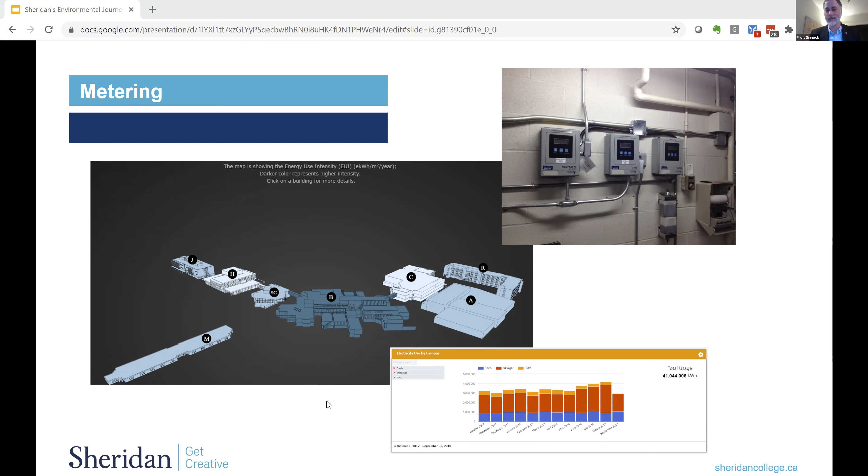So here's the journey in pictures, just sort of bits and pieces of the whole thing. So submetering, we had all kinds of stuff we couldn't see. How much energy do we use? I don't know. So submetering gave us this opportunity to say, all the energy that's going into a building, we now can quantify it, we can display it, we can analyze it, we can understand it. Now it's manageable. Then there's pretty mundane stuff. We have bad doors, let's fix the doors. We have windows that let in a lot of solar heat gain. Could we make those better?

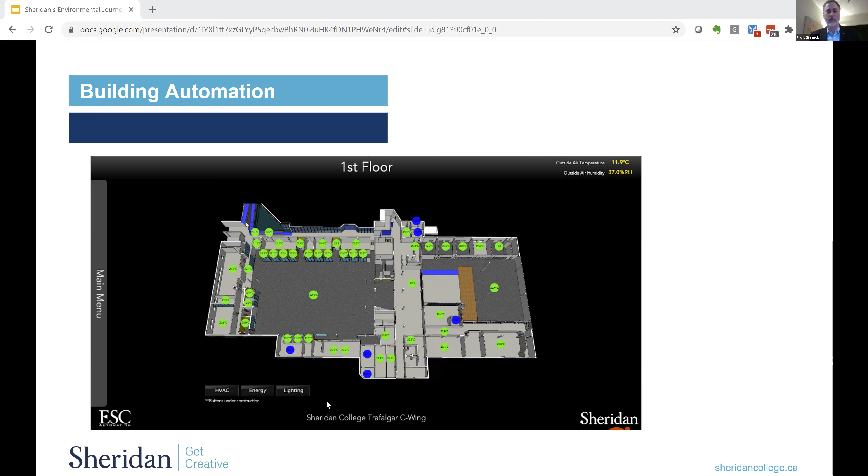And all of that, just in the business of, how do we make the buildings better? Our poor building operators, they couldn't see if something was going wrong. So we gave them some tools to quickly highlight, hey, this room's too cold, this room's too hot, this one's just right. These Goldilocks zones of rooms across our whole facility. So now they had these tools at the ready. They could pull them up and see, is there an area I need to go address and pick up? But again, pretty routine stuff.

The lighting was horrendous. In an office one night, I put a little sensor just to measure lighting. It showed me that the lights, for some reason, turned off for the day at about 3 a.m., turned on again at 6 a.m. This is completely random. So across this facility, we had lights that were misbehaving. You know, it's lights behaving badly time at Sheridan. So our program was to replace with fewer but better fixtures, typically LED.

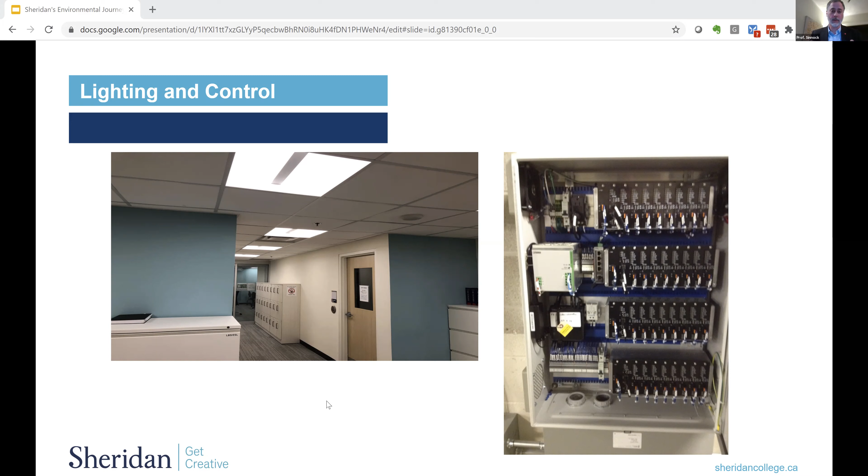We could actually adjust the timing of how long lights stay on. We could also dynamically reprogram a space if it changed uses. Now it's an office, now it's a classroom. Well, we don't have to rewire lights. We just reprogram. So really tons of flexibility in that.

So then comes this challenge of, you know, we've got new buildings coming up. What are those going to look like? And we really wanted to make sure we were beginning to incorporate all of these great energy saving features we saw into buildings that should become the most energy efficient in North America.

So this was around the time when we were specifying these when I took a trip to Sweden, and I'm looking at doors with double seals. I'm looking at wall assemblies, triple pane glass, high R value, very highly insulated and no infiltration, right? So no air getting through these things. And I'm thinking, I've got to bring this back.

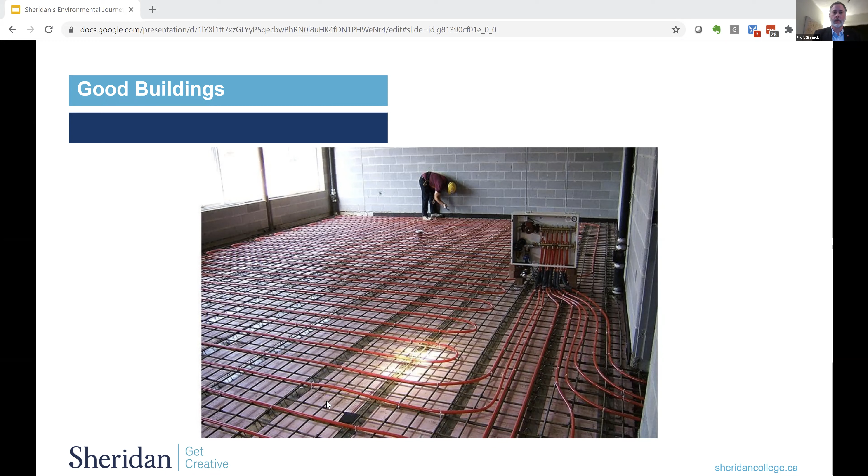It brings in just the amount of ventilation it needs to keep occupants healthy, and it uses 110 water source heat pumps to heat and cool spaces as they need. So if they're occupied and they need cooling, then the heat pump does it. And the idea basically is those are all tied back to a common loop. So it might be that half the building's heating, half the building's cooling, and we're going to use the least amount of energy we need to.

But electricity is expensive. Maintaining 110 heat pumps is really expensive. And would you look at how much glass is on that building? All that sunlight, all that heat getting trapped like in a giant greenhouse.

So when we measure performance, we talk about this idea of energy use intensity. You sum up all of the energy that's consumed in a year, and you divide it by the square footage. This building would consume about 277 kilowatt hours for every square meter in a year. You compare that with an Ontario average, that would be like 330, maybe 350.

You compare it though to Germany, a German A-rated building, so at the top of the spectrum at the time, that would have been low 100s. So low 100s to 277 to our average at 330. Not the best we could do.

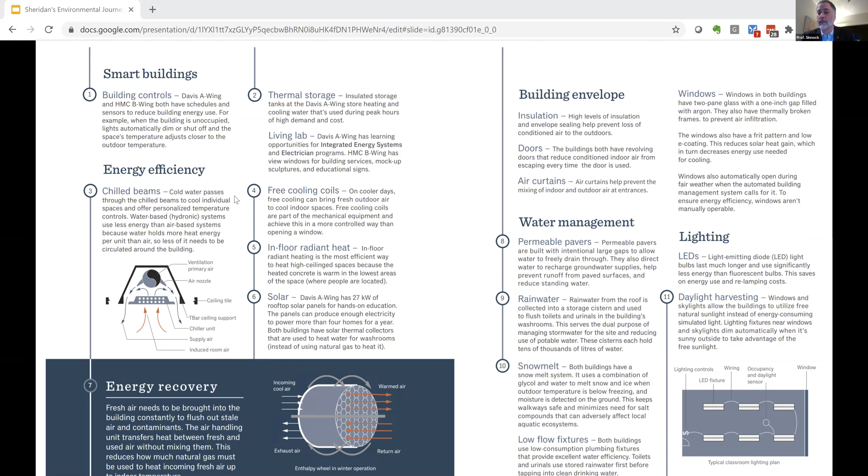And all of this stuff really quite heavily featured in the industry magazines and in press because it's just interesting and new and novel. I also point out here that we do rainwater capture from the roof, that we use it to flush toilets. And we melt snow rather than applying salt outside our sidewalks. So we've tamed all this energy demand.

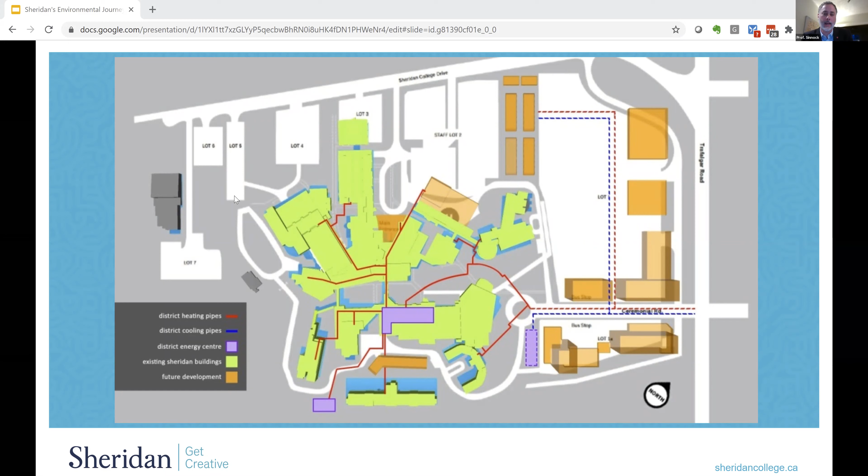Our attention now turns to how on earth do we get heating and cooling to this? How do we tie in the existing buildings we've got? How do we build new when we're building out the site? And we look again to Europe. They use these wonderful district heating systems. We talk about district heating in North America. What we mean often is I've got a steam boiler somewhere and I'm sending steam through pipes to somewhere.

European style district energy still has some property that needs to receive heat or cool. It has pipes. It has some source of that. It has probably the ability to recover heat from somewhere, but they will always use a pressurized hot water, so only water, not steam. And they'll try to keep the temperature very, very low. The lower they keep the temperature, the more heat they can pull from places where it'd otherwise be rejected to the atmosphere or thrown out. So they've found this way as a path to get to these low carbon integrated community networks.

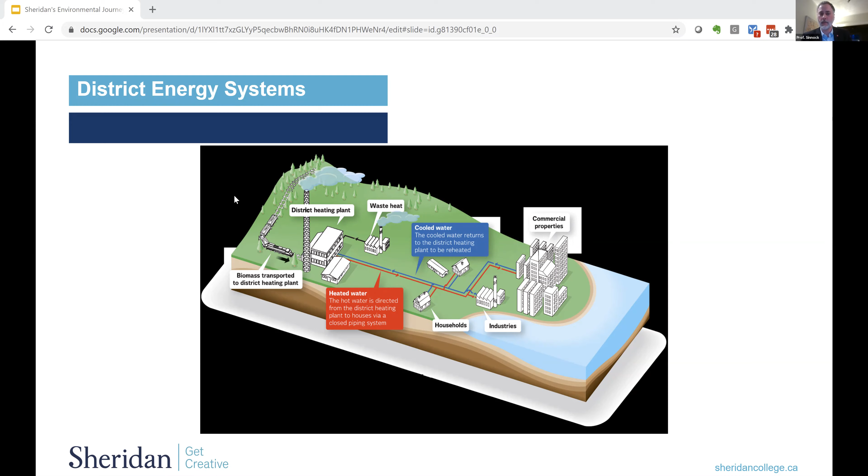And this is complex. It was complex for us. We wanted to know how we were going to implement this authentically, how are we going to create value, and we had a bigger plan in mind at this point. So we began assembling around us bit by bit a strategic implementation network, partners that could work with us. And we began implementing like crazy.

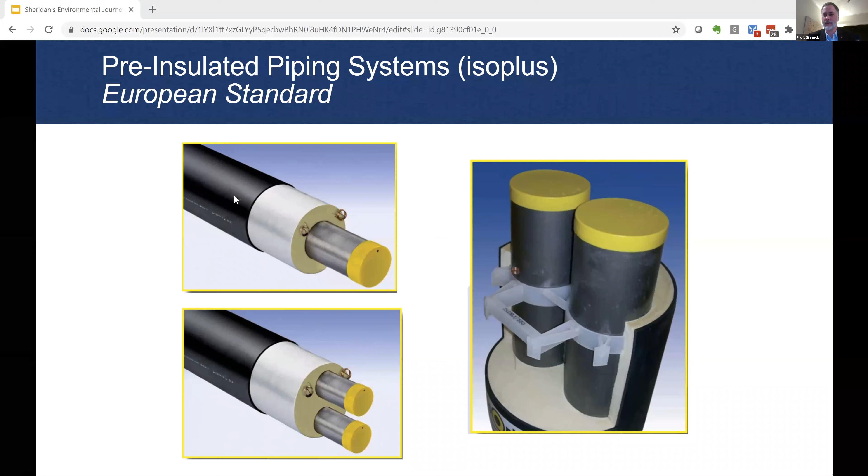So 2016, we started putting pipes like this in the ground. These are pre-insulated pipes. They're manufactured. They come like a system you put together, part A to part B. They have a rigid jacket, this closed cell insulation. They have leak detection, so we know if they break, and they're meant to be in the ground for 50 to 75 years. And the awesome part is they don't go very deep. They're so fast to put them in.

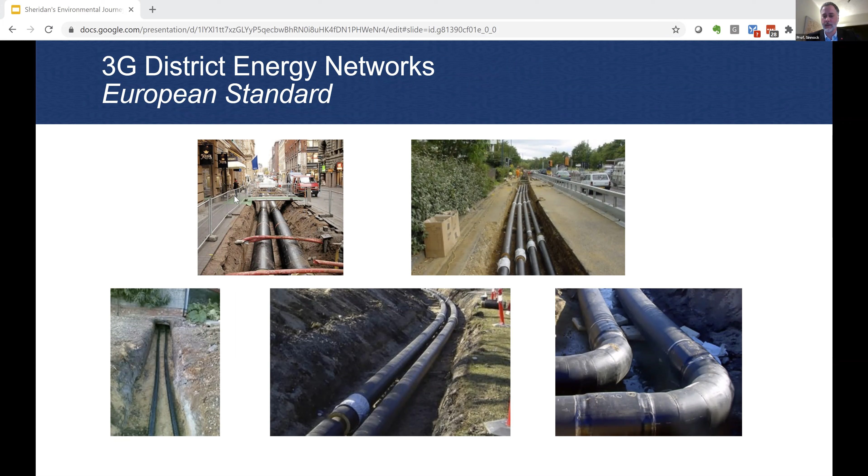And this is, again, just an area where the Scandinavians and Germans had figured it out over hundreds of kilometers of this stuff. And yet still in North America, we're trying to figure out how to make this as complicated as possible. Let's put it in a concrete vault. Let's spray foam it. Like it's ridiculous. We even bought the right product, but we put it in wrong. My eyes were rolling back in my head as I'm sort of looking at what we're doing in terms of not honoring the actual intent and method and cost.

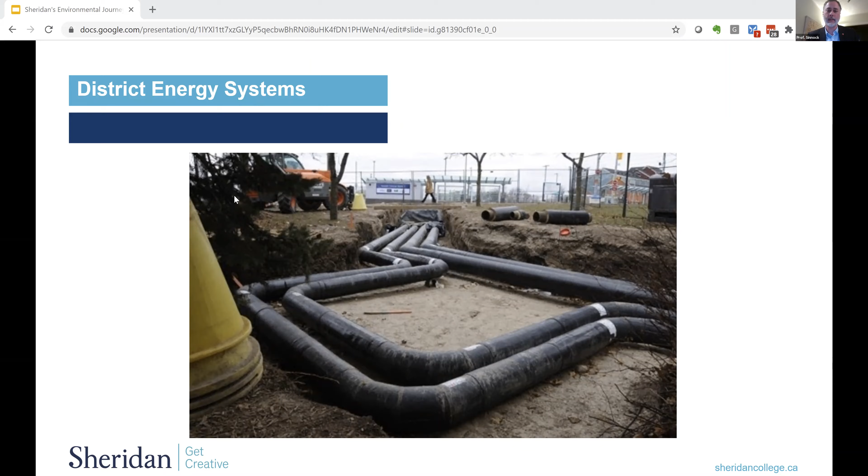2016 in the summer, we had 16 weeks. We put 3.5 kilometers of this pipe in the ground, both Oakville and Brampton. In this picture is actually these long lengths of twin pipe. This is supply and return in one pipe jacket. This is actually a way to save energy. It was the first installation of twin pipe in North America, and it was done at European costs.

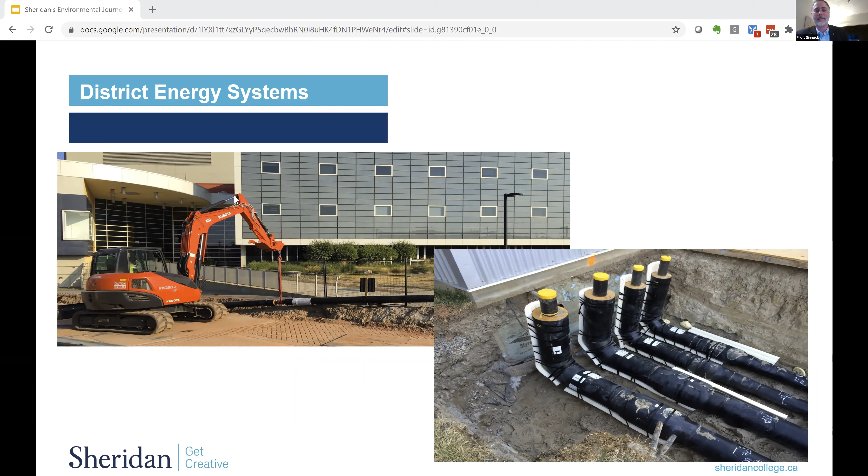Expansion for these things, it's engineered into the system. All that you need in order to handle expansion in a system like this are these little foam blocks that I think they might have electrically taped to the pipe, but that's all it really needs. So it actually becomes very, very simple, very quick. And as the crews get more experienced, they can do this very fast. This became part of what we started telling the communities around us: hey, we can do this really fast.

We needed a way to put heat in. I was inspired by what I was seeing out there, these architectural masterpieces that were out in communities in Europe, where they're centerpieces of the community. Could we build something beautiful and functional and highly efficient? This is in our skilled trades building. I glassed it in so the students would go, what's in there? I want to know what that's about.

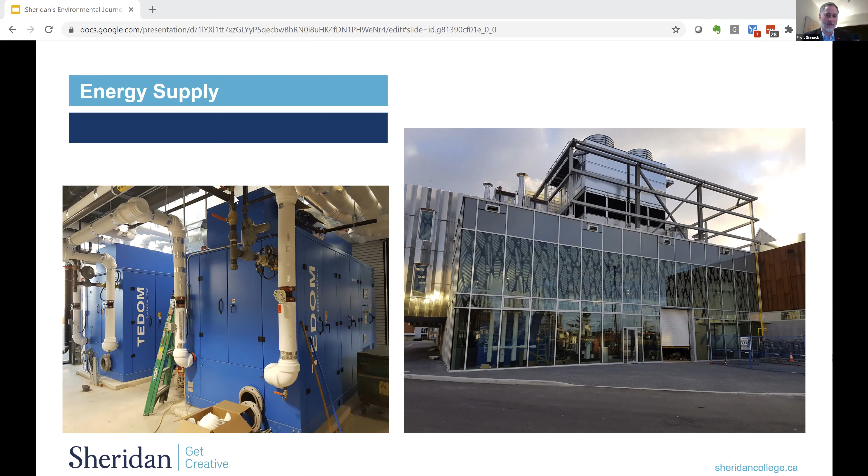We tour this thing in a non-COVID year all the time with students, with press, community members. We're in there like once or twice a month. This has been very popular as this community feature, and it's really, really pretty. I really like it. It shows up really well.

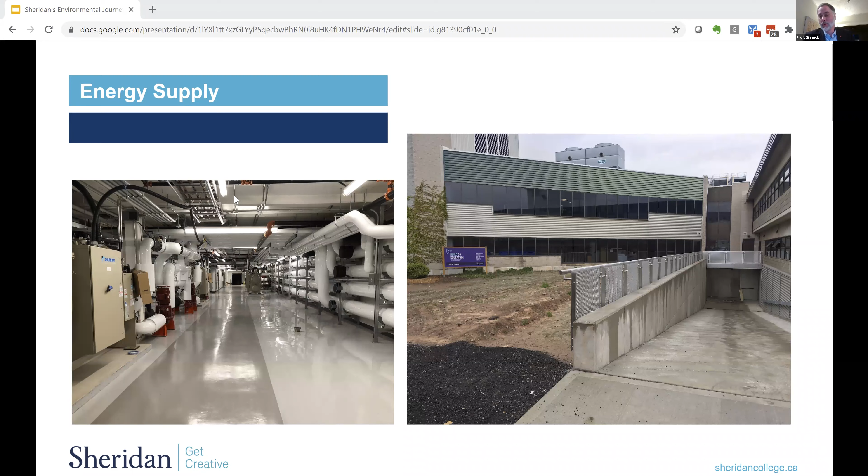We built one in Oakville. We put it in the basement of an existing building. It wasn't easy, but we did it. And at least we learned. And then we go back to Europe again. We got to connect district energy to buildings.

In Europe, they build these all things on skid packages, everything you need to interface a building, including metering it. And they drop these into a space. Within a few hours, they can be connected and commissioned. Meanwhile, in North America, we're building rooms full of equipment, one piece at a time, and then taking months to program it up. It's actually pretty silly when you get to it.

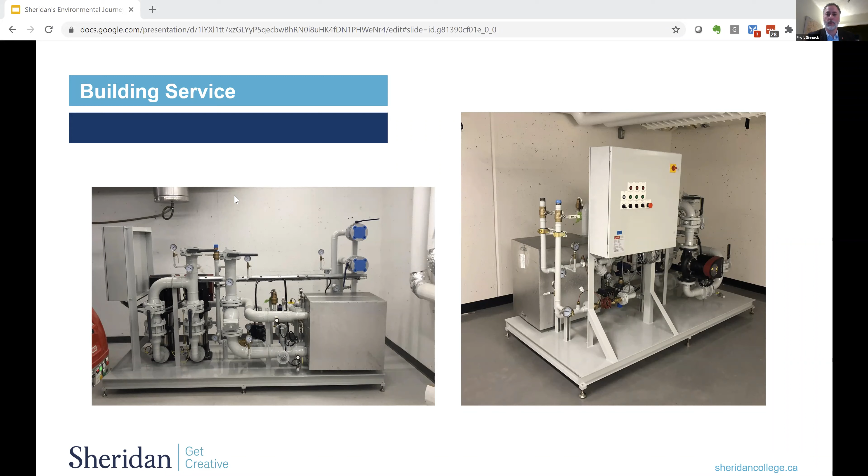So we actually went to the global manufacturers and we said, you know, we want you not only to sell us this authentic thing, but we want you to make it in North America. We want to know that you're committed to the market here. These were built by Danfoss, which is a large global company, and they were made in Michigan and shipped to us, and they're still making them in Michigan.

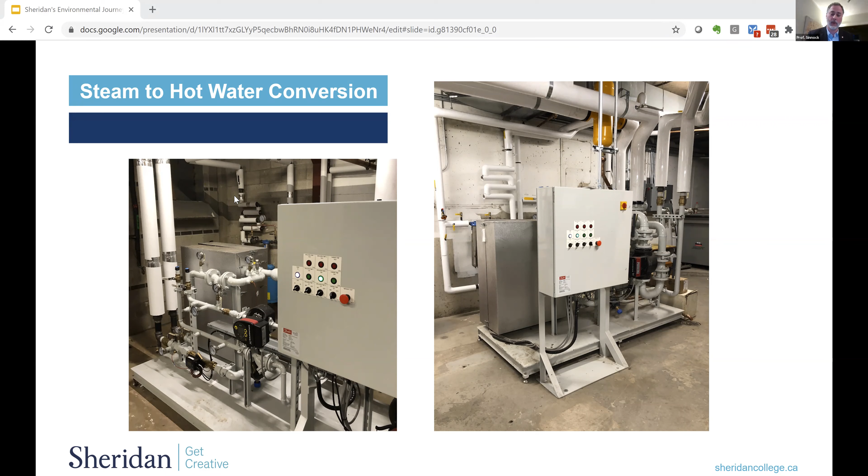Okay, should we show the result? You guys are pretty good. You've gotten 2 out of 2 on this one. It is 65%. When we measured how much energy we dropped into the system and how much actually made it to the buildings, we'd lost most of it. That's the issue with a North American steam context, and part of the reason why authentic messages and approaches matter. So it was effective. We really have seen a drop.

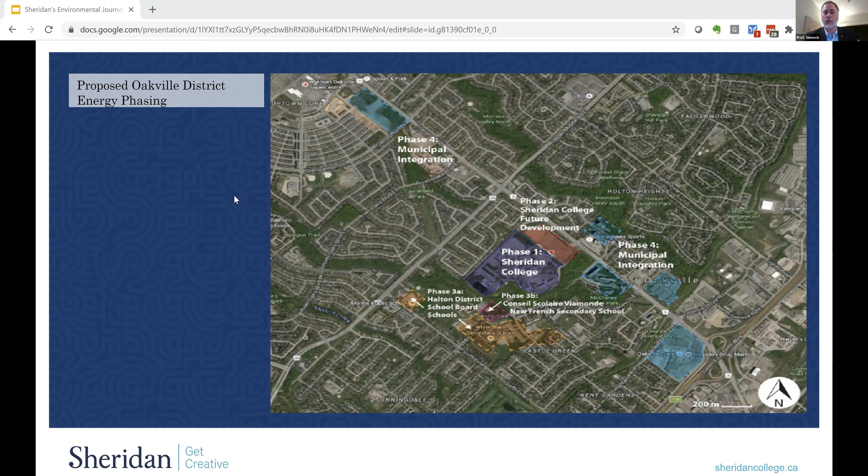I want to kind of get to this last piece of community. So we noticed that these district energy networks like we build on our campus are usually really big in Europe, and we wanted to see how on earth do we get our municipalities into that conversation. So we went to them. Hey, Oakville, should we work together to build a big community energy plan? Can we get our community stakeholders together and build something? Hey, Brampton, can we build a community energy strategy with you? And the staff were very, very receptive.

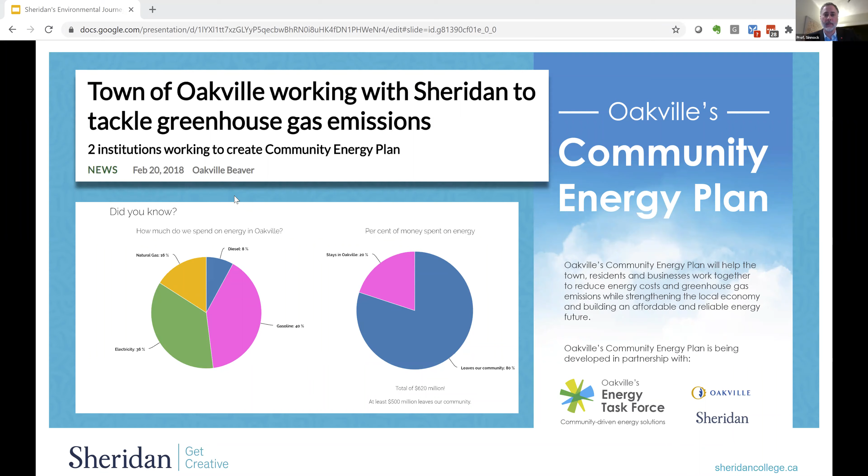So between 2017, 2018, and about 2020, we worked with community members in these communities, about 900,000 people in total in the communities, represented by 30, 40, 50 task force members, to create these amazing 30-year plans for how we are going to evolve. Brampton had this wonderful land use vision, and we said that needs an energy story. So we began setting up some really basic goals.

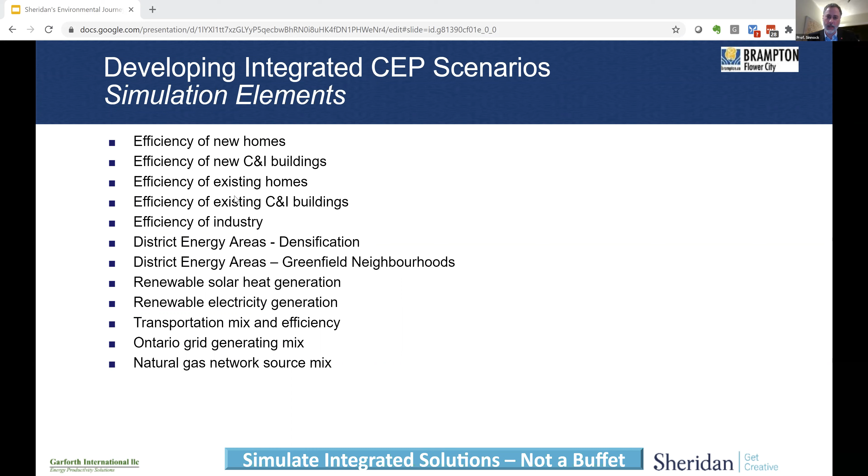We simulated all the possible ways we could begin to deflect the business as usual case and really bring the carbon and energy out. It kind of looks like this. Doing a whole bunch of things, retrofits, new transportation options, district energy systems, really radically transforming. We could actually deflect the curve. We could meet the community's goal for 2040, but oops, we missed the federal Paris Accord goal.

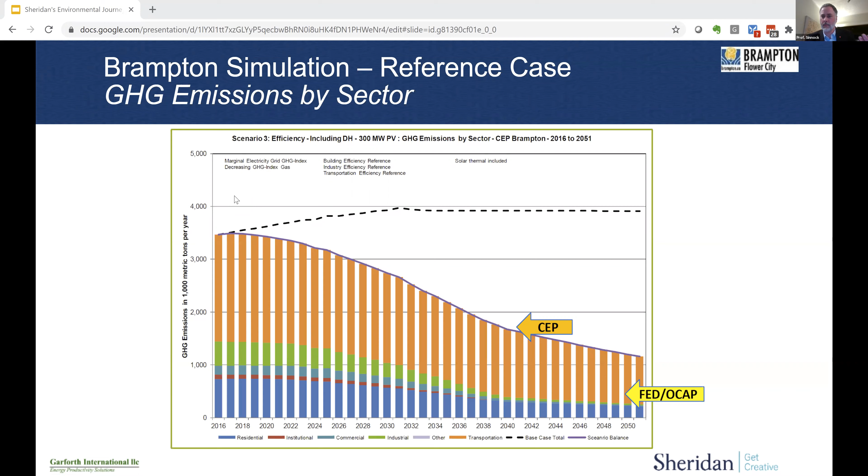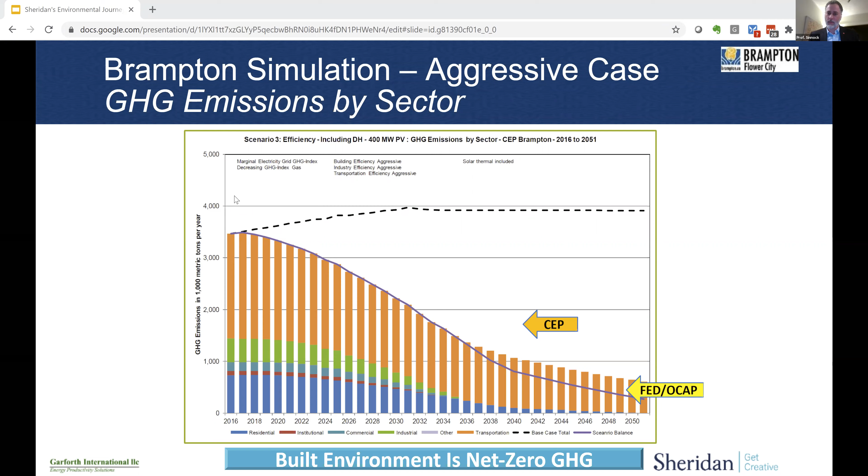So now comes the question of, maybe if we get good at bending the curve, we could just run faster and do more. So we simulated that just to see. And yeah, we can actually probably meet a federal goal if we just do more of the same, if we turn the crank a bit faster. So all of this is showing us in numerical data, as we're talking to this community task force, that it is possible for us to plot a course for these communities that sees us meeting our commitments to the future.

So September 2020 saw the unanimous endorsement of the community's plan in Brampton. It was a big milestone for us and for the community, and the same in Oakville in February of 2020. Again, a unanimous decision by council. In Oakville, this has already taken the first steps in implementation. Oakville now has this not-for-profit community organization called Future Energy Oakville. It has its founding board of directors.

It is not yet staffed. This board of directors includes Sheridan's Vice President of Finance and CFO. And my team is continuing to engage and advise this group and work with Brampton, who is on its way to actually creating the same kind of entity. We actually had a really fantastic meeting today with the task force on that. So now our little energy story on our campus has become the community story.

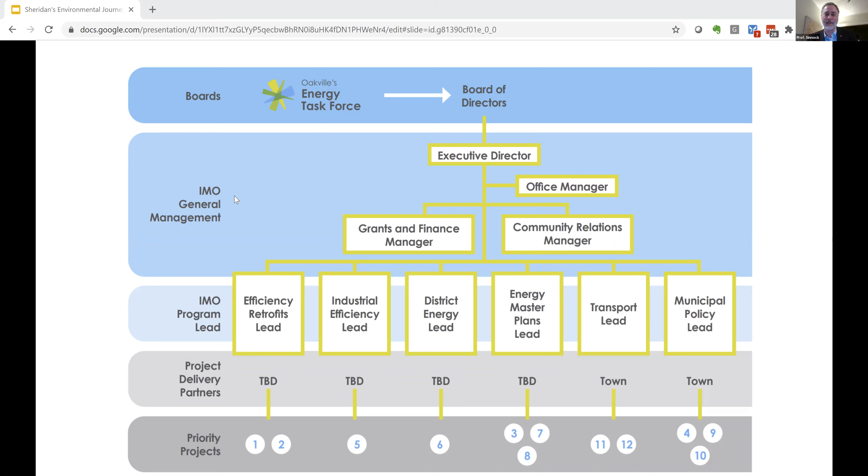And that brings me to the conclusion of three stories on how a little campus with its own insular ideas becomes part of a community transformation. And you as Rotarians know the power of pulling together community. We're learning to trust and drive that transformation. And I hope this at least inspired you to reach out to those institutional partners you find in your neighborhood and really kickstart some of this change.